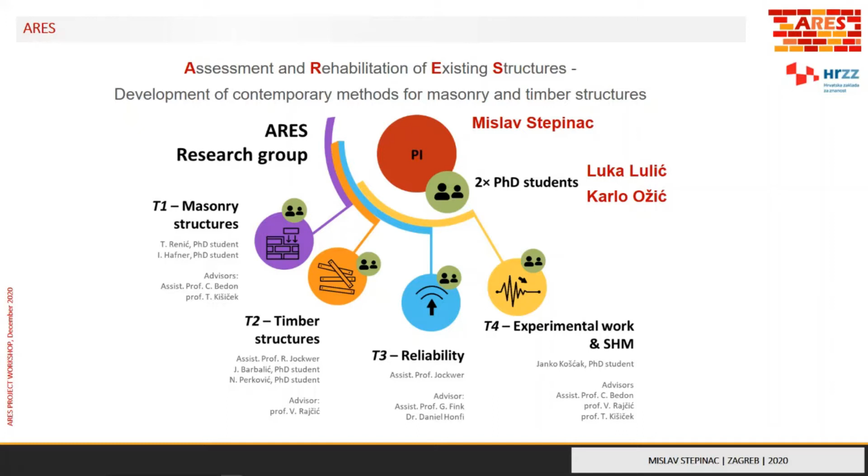Unfortunately, Daniel Honfi is not working anymore at ARES, so he will not be part of the working group because he has some other obligations now. For experimental work, we have all of the professors from University of Zagreb with Ivan Dubnjak, Domagoj Damjanović, Marko Bartolac from our lab, and of course Professor Kišiček, Rajčić, and Chiara from Trieste as advisors.

So I will not go into these objectives because I was talking about them yesterday. I'll try to shorten this presentation, but it will be online so everybody can see what we are basically doing and what we are dealing with in this project.

This is the timetable or timesheet of the project. We decided to have 20 different case studies, 10 for timber, 10 for masonry, and we will do proper assessment, on-site assessment, proper modeling in the office, and we will have several case studies also with proper structural health monitoring and continuous structural health monitoring.

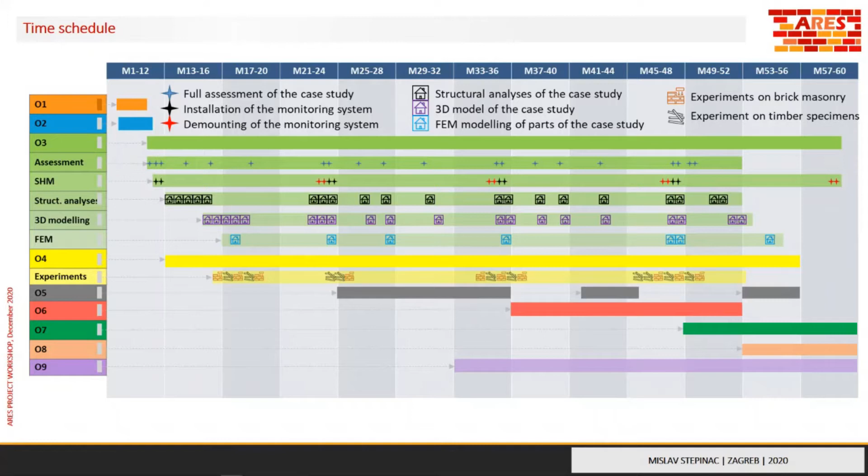In the end, we will do some reliability and proportionality analysis just to achieve material properties, loading history, and parameters that are influencing structural performance of buildings. In the end, we want to produce something to help engineers in their normal daily work.

So we have several project modules. The first one is development of a concise database of structures and assessment techniques, with compilation of an inventory of material properties and load types.

Then we have model development, analysis, and sensitivity studies in module 2. In module 3, we have model verification and optimization with some experimental work in the lab. And in the end, we have evaluation of proportionality and reliability, and design and development of design guidance.

So in the end, we want to produce something to help all of the engineers in the field to have easier and quicker assessment, and of course more correct assessment, of existing masonry or timber structures.

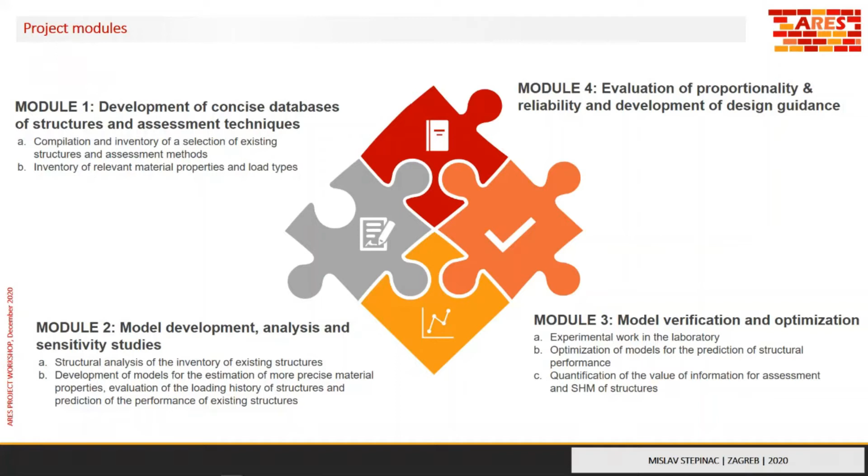As you probably know, Zagreb was struck by an earthquake on 22nd of March. This project started on 9th of January, before the earthquake, and we are dealing with masonry and timber. So for us, this is actually a great opportunity to have a lot of case studies, because we will have the opportunity to assess more buildings because of this earthquake.

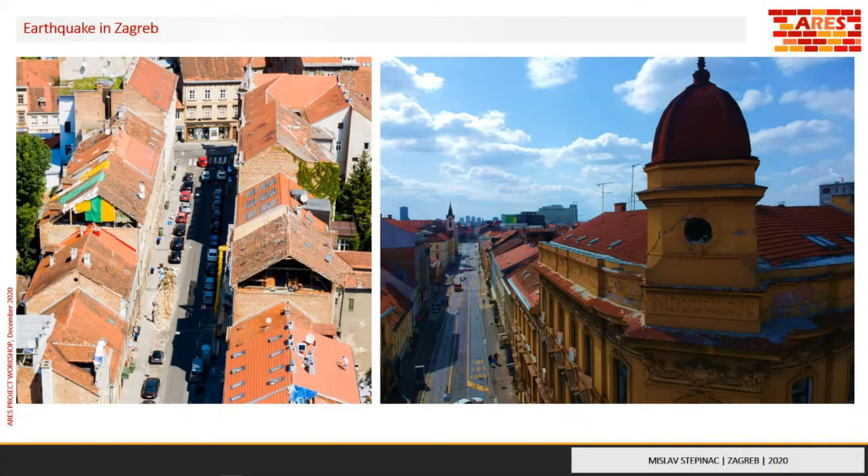You can see on the figure on the left how one normal street in the downtown of Zagreb looks like now, after the earthquake. The earthquake was moderate to severe, so we don't have a lot of collapsed buildings, but we have a lot of damaged buildings. So basically, for the next 5, probably 10 years, we will do the rehabilitation and renovation of this kind of buildings, which are of course masonry buildings with timber roofs and timber floors. On the right, you can also see some structural heritage objects which were heavily damaged.

So today we will have several presentations.

So it will be several of us from University of Zagreb. Then we have Robert from Chalmers University in Sweden, in Gothenburg. Yesterday there were some presentations from University of Minho. So if somebody is interested, they will be also put online on our webpage.

Chiara will have one presentation. Chiara is coming from University of Trieste. Then Igor and Iztok from InnoRenew and University of Primorska, from Koper in Slovenia. They will share their knowledge from the assessment of existing structures in Slovenia.

And I'm particularly happy because we have two designers who will share their knowledge: David Andić from Studio Arhing and Ivan Matorić from People's Associates Structural Engineers, who I'm really thankful to for sharing their time, because it's not very often that people want to produce, show and share their knowledge, since they are always too busy. Ivan and David are very interested in this work package. We are doing it with both masonry and timber, and we'll see what they are doing in their professional time.

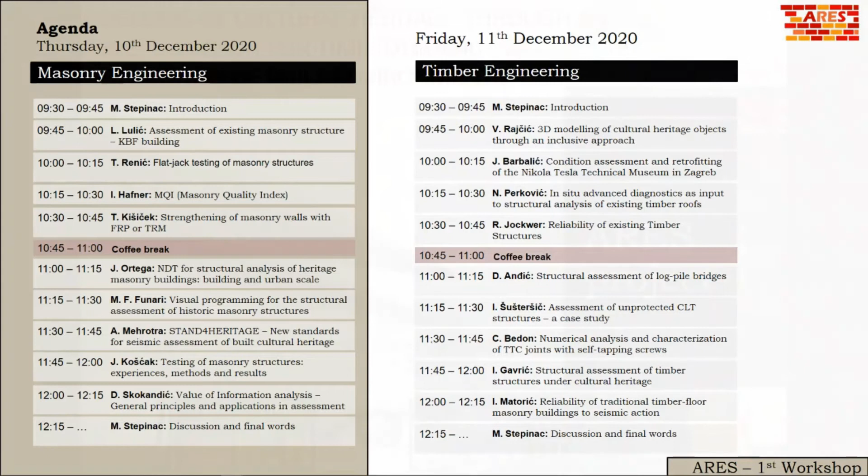And now I want to introduce Professor Vlatko Rajčić. Good morning, everybody. My presentation will be connected with the Horizon project Inception.

The work that we did is a very important task for cultural heritage: digitization and 3D modeling of cultural heritage. This will produce very large amounts of data after all this digitization is made in the world, so what to do with the data and how to manage it. Inception was a very complex project with lots of topics, and I will try to explain the main concept of the Inception project, the main goals, and some of the results we achieved.

You see it's inclusive and time-dynamic 3D reconstruction, that's its aim, for everybody from everywhere, inclusive for all types of professions, in a model that everybody can use. As you can see, it's from the program Horizon 2020 Reflective, a social program, and this concept tries to bring cultural heritage to everybody.

That can be used remotely to visit cultural heritage sites. It started in 2015 and ended at the end of 2019. You see the web page if somebody is interested, there is a lot of material there. I will bring just a very small amount of the information.

The consortium was made of 14 partners from 10 European countries: 5 universities, 2 research centers, 6 SMEs, and 1 industry partner, which was very important because they produce laser scanners. In this project, they developed software as well as hardware dedicated to laser scanning of cultural heritage objects. This is our team.

From UNIZAG, it was mainly the chair for timber structures. Mislav was there in that period with Jelena Bleiziffer, who is not from the timber structure field but helped us with the BIM.

These were some of the aims, and we will now go to what was done at the University of Zagreb. You can see one of the case studies. We had 2 case studies. This one is the Technical Museum Nikola Tesla in Zagreb.

For the capturing of 3D data, we used photogrammetry as well as unmanned aerial vehicle drones. This is the model that we obtained by drones. This is our equipment.

As you can see, it's the Cadmic Goliath 8 Max system, consisting of a drone with payload up to 5 kilos with 8 propellers. This is some technical data, and it could be navigated via GPS or manually navigated. Importantly, it has displays on the land, on the tripod, so you can see everything going on with the drone on the monitor.

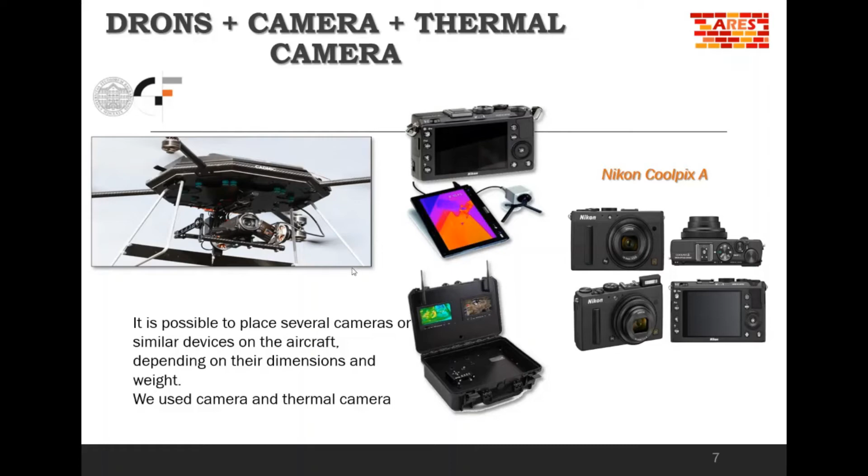You can see it's possible to put several devices on the gimbal of this drone. We usually combine a camera and a thermal camera to see what's in the roof and all around the structure.

Further on, with the help of the University of Ferrara, we did laser scanning of the Technical Museum, obtaining a point cloud of very high accuracy. So now the museum has every point documented in a very accurate manner through this laser scanning.

Having these 3 data sources and lots of data from the previous period when we did reconstruction works, assessment, NDT testing, and all kinds of visual inspection measurements—which will be presented by Jure after me—we were ready to put this case study on the Inception platform.

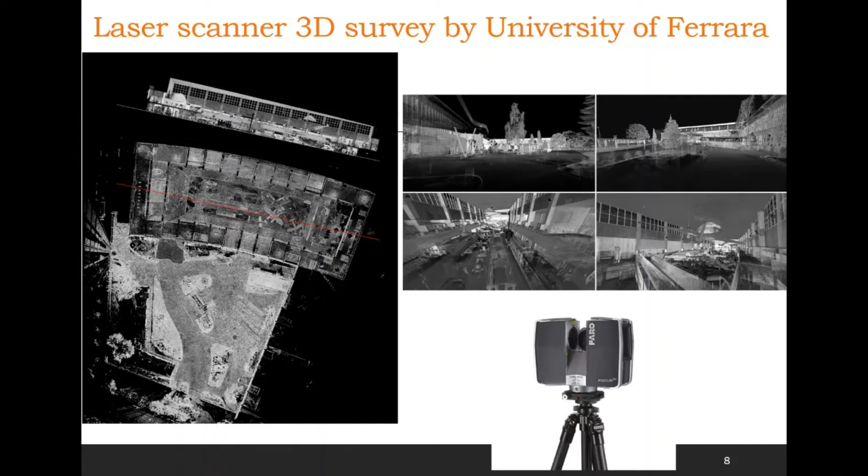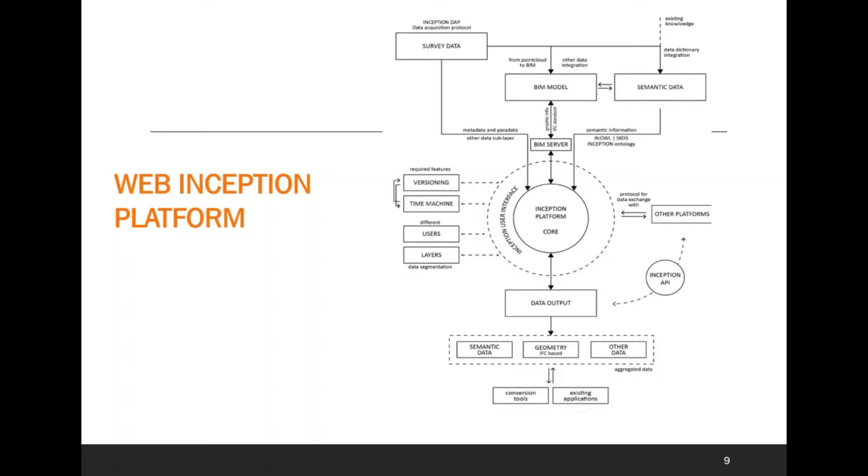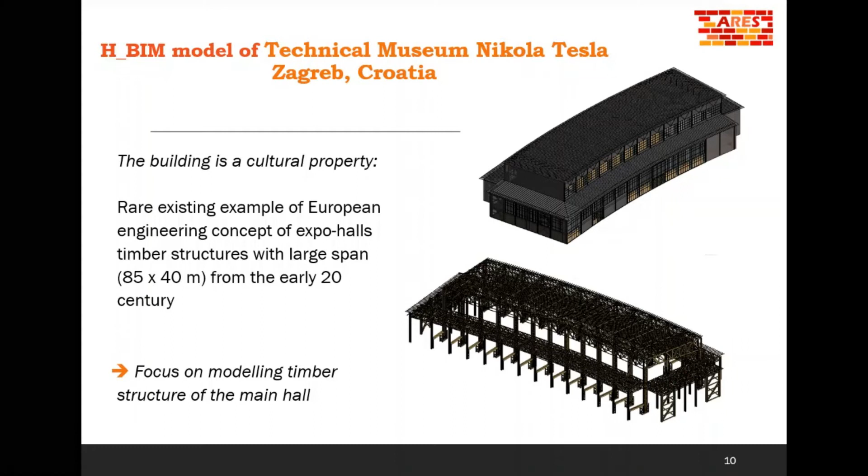Our focus was on modeling the timber structure of the main hall, hall A. You can see the structure covering the whole object. The BIM model was modeled in Revit software and reconstructed from available documents and on-site measurements that we did before.

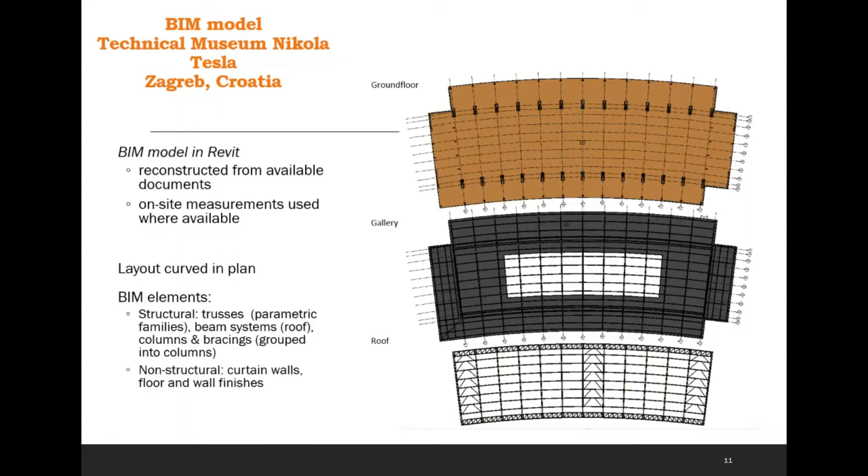The layout, as you could see, is a curved plan, a cutoff of a curved plan, and the BIM elements are structural and non-structural. Regarding the structure, we have trusses—primary and secondary trusses.

In the longitudinal direction are the secondary trusses, which you can see above. All the trusses and elements were modeled as parametric families.

So if you change one thing, you don't have to change all the elements—everything changes according to just one parameter. We had a lot of beam systems, for instance on this gallery and also on the roof.

There was a very large variety in forming the columns, which are multi-part columns with diagonals. These are space diagonals forming very high bearing capacity columns, with bracing systems also present in the structure.

Non-structural elements, which we can see here, were curtain walls, floors, and wall finishes.

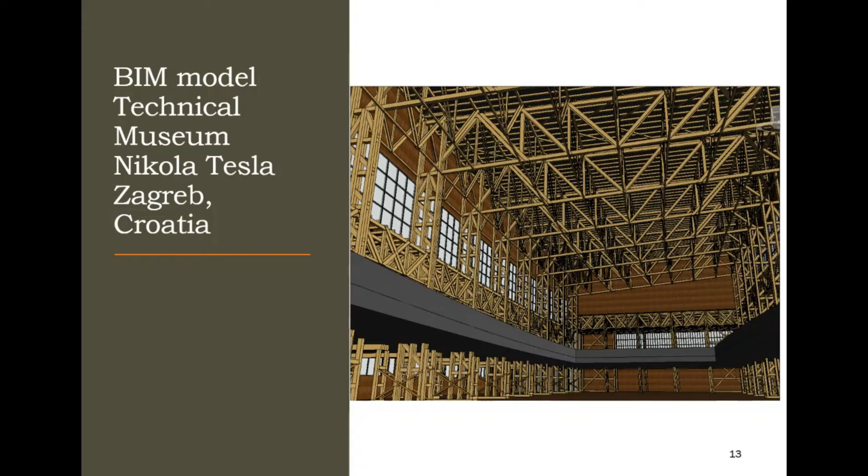So we now see impressive structure, which could not be seen when you enter the museum because it's all covered with a lining. We will see the picture. So we try to emphasize that it is a very valuable structure underneath this layup of the technical museum.

As it is a very complex structure with also, as mentioned, curved alignment in plan, there was a large number of elements. There were very large files, heavy files, which had to be uploaded into the BIM server.

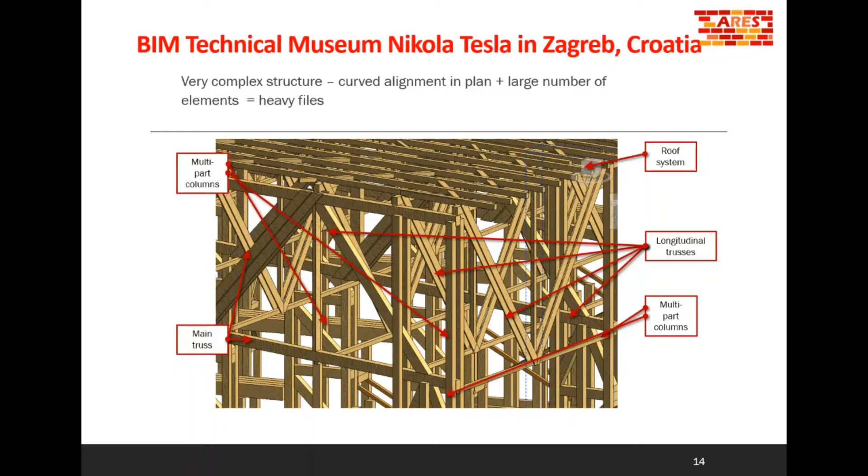So this is the scheme, just the upper part, because we are coming from three parts as input: survey data, then the BIM model, and on the right side semantic, which is very important - I will explain later. So this Inception platform on the left, survey data, we also put metadata or paradata or any other layers into the BIM server.

This central part is a BIM server. That means that the BIM model from IFC standard, whatever software you are using, you get IFC standard format. And here you can also put additional graphic info as an input to the BIM server.

Usually, for the additional graphic info, we use some graphic files, and especially for another object it was a texture of stone. But for this, we didn't put so much trouble into the texture of certain layups.

This is the BIM server. So the data are coming to this BIM server, and it is the interface where we prepare the model to the conversion. So in this part, you can also add some properties.

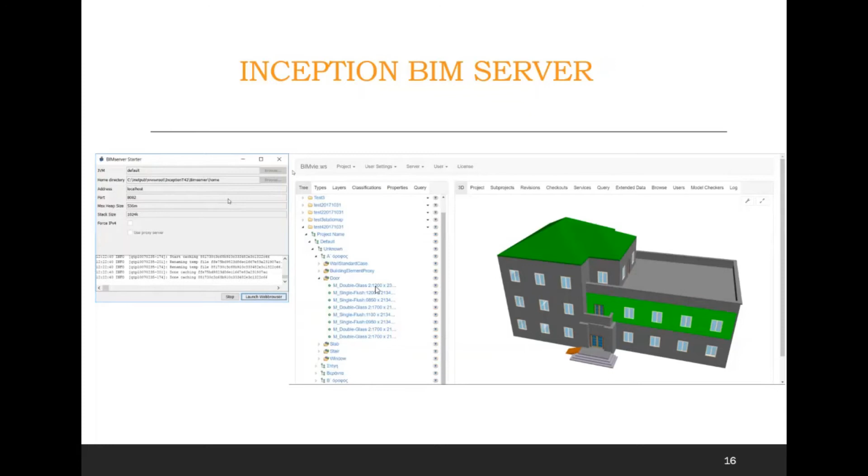Further on, there is a possible path on the right side for input semantic enrichment. For the Inception platform, semantic data store is chosen, not object-oriented programming, but the semantic.

And for that, a powerful SPARQL 1.1 support engine was used. And the same engine performed powerful queries inside specific 3D IFC models also. Different options can be used as well, as it is one unique solution.

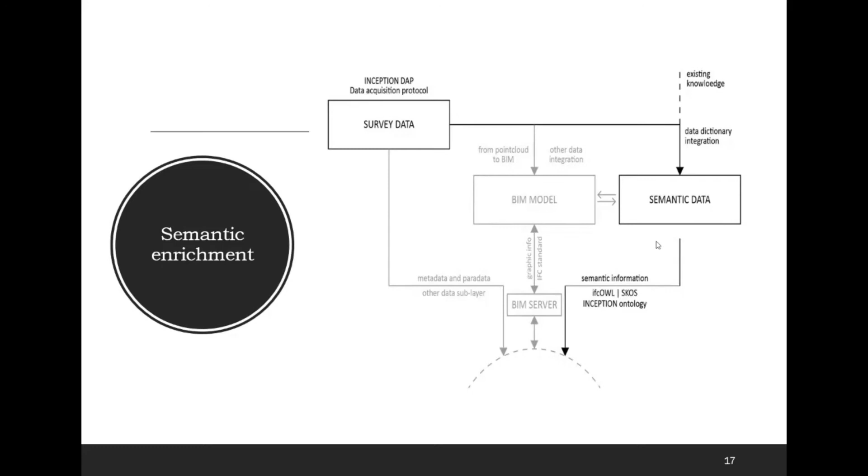And also with this semantic data, we can visualize the SPARQL query results. We will see it later directly in the web-based 3D viewer.

So we are actually going from the BIM to this another type of format, so from IFC to RDF format. IFC is well studied - it's this BIM format. Also, it's freezing and documenting the design status of the model.

And this is for this platform. It is very good that you can model in all kinds of software, so it can process the data irrelevantly of which authoring platform of IFC you used.

So IFC, this BIM model, is now transferred into the so-called Resource Description Framework. It's a family of World Wide Web Consortium specifications. The format was originally designed as a metadata model, and now it is established as a general model for conceptual description of information that is implemented in web resources. It is also adopted by the World Wide Web Consortium, and it was recommended already in 1999.

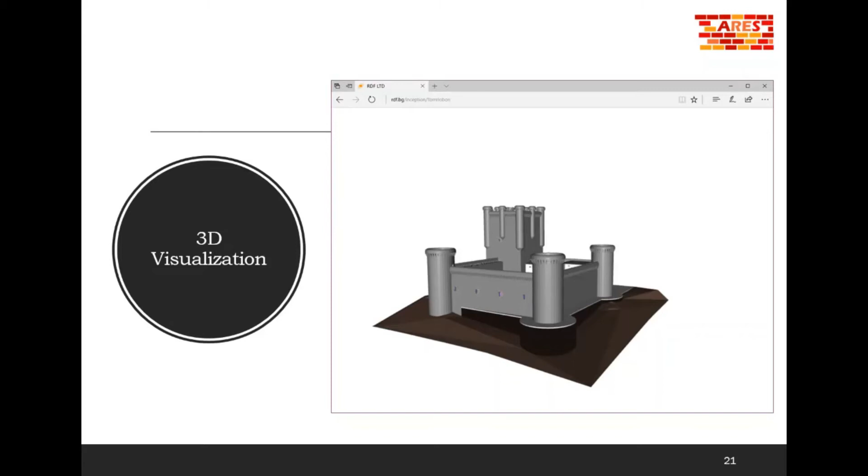So after that, we are now in RDF format, and in that format we can also do the visualizing of everything that we need. This is one case study from Spain, a very old fortress.

Also, elements of the model on the web platform can be selected by the semantic. So indeed, in this RDF format, everything is done and chosen through the semantic characterization. On the right, you have all the data of the selected elements in the form of semantic data. So if you choose, for instance, you can select by the thickness, by the material, by the age of some elements, and so on.

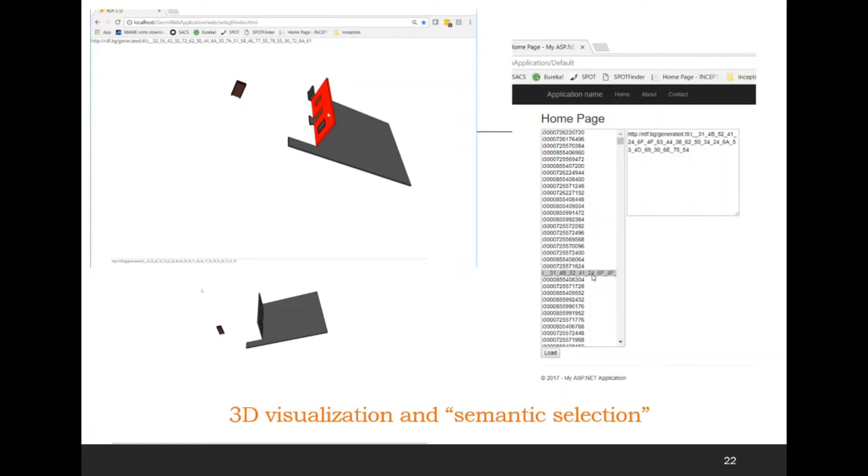Also, the whole files can be treated as semantic documents. Coordinates or GPS system already brings you one semantic level, since the position where your object is located matters.

After that we have the use of the Inception platform, and one option is the time machine, which this project is famous for. So you can also put the time dimension into your modeling.

For instance, we did it with our case study inside the Technical Museum, which is not so new, it's from 1948. But another case study was a very old church in Dalmatian Zagora. We built this model as a history model through 4 phases, from 1688 until 1911, 4 phases that we could find in the archive, mainly always additions to the existing structure.

So on the Inception platform, we can see this available time, the so-called time machine, time dimension. You look at some object and you can see it through time.

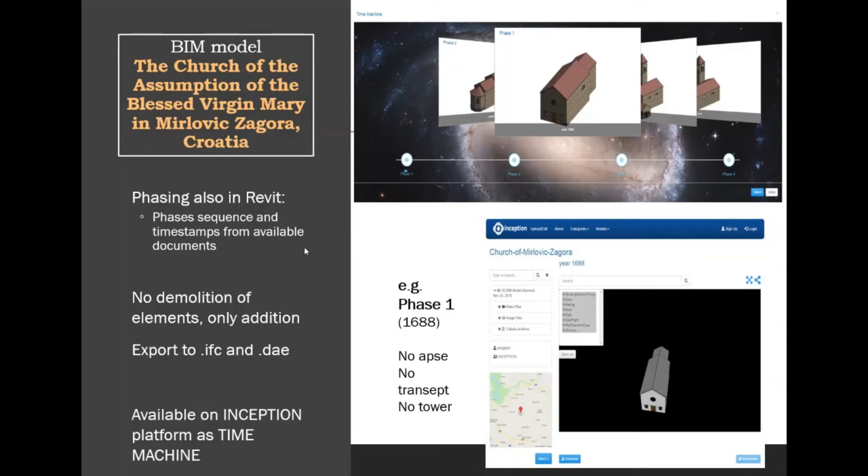Another possibility of use through the Inception platform is versioning, so we can use this data for all kinds of purposes. For instance, in the Technical Museum, we did this application for the artifacts, in the Tesla cabinet for instance, we did it for all the artifacts.

It's based on, you can see this with the automobile. On the shape, you just put your application tool and find the shape, and when it fits the shape, you get all the information from all kinds of data retrieved before about the artifacts, so you can see what you put - all the photographs and technical information and so on, whatever you want to show to the visitors.

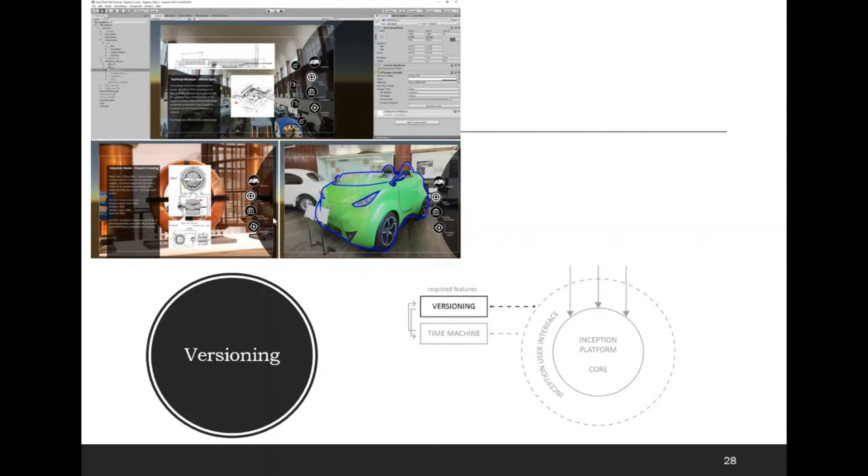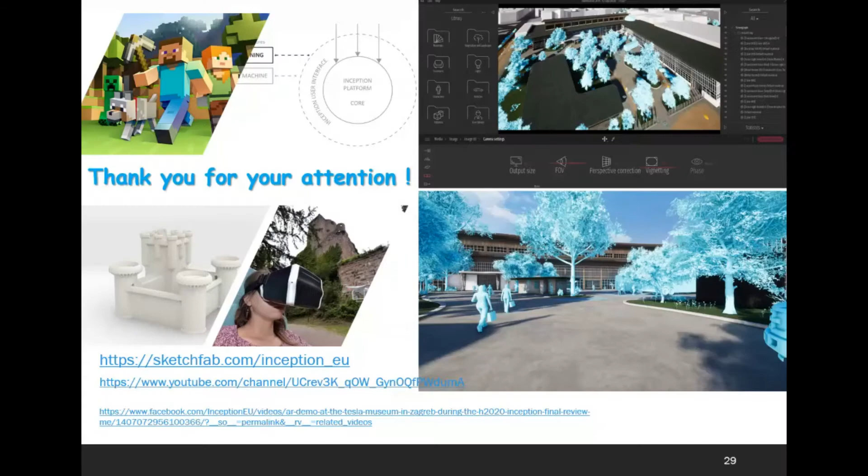Also, we can make all kinds of virtual tools. We can make films, we can build augmented reality applications, all kinds of virtual tools. We can go through the object through virtual reality, all kinds of applications.

There is one additional thing I was planning to show you. It is connected to the application. On the Inception website, you can see a lot of applications also for the Technical Museum, where you can put the application and see beneath these linings, you can see the structure.

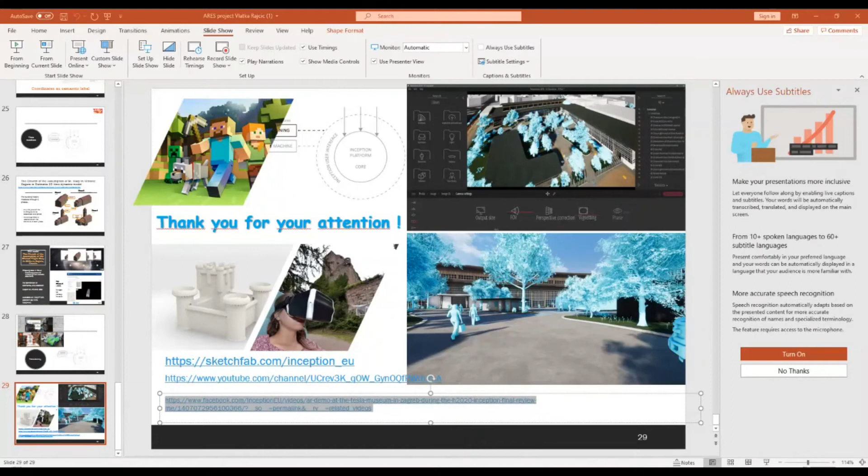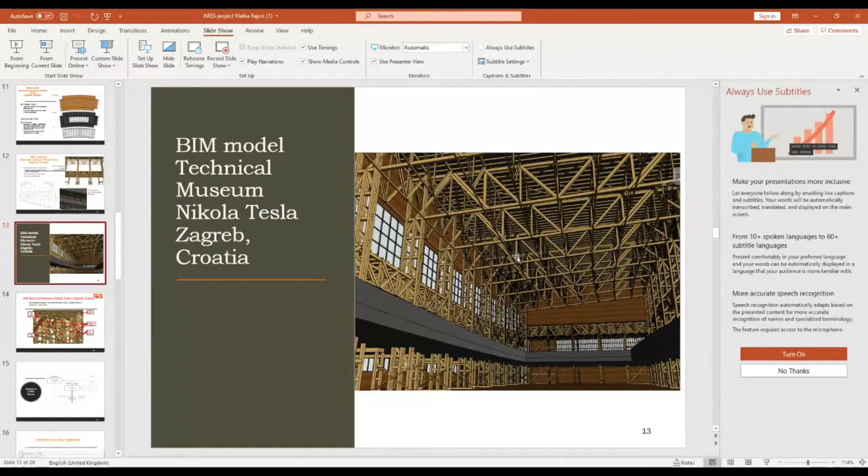For the visitors, they can see beneath the real museum, they can see the whole structure. So if you are interested, you can go to the Inception website, which was presented here, and you have YouTube videos also for 3D and time machine.

One case study that was especially well established and refined is the Innocenti Center in Florence, which goes through the times - they have lots of phases in which they developed their model. So that's all, thank you very much for your attention.

And if there are some questions, I don't know if they will ask now or later on.

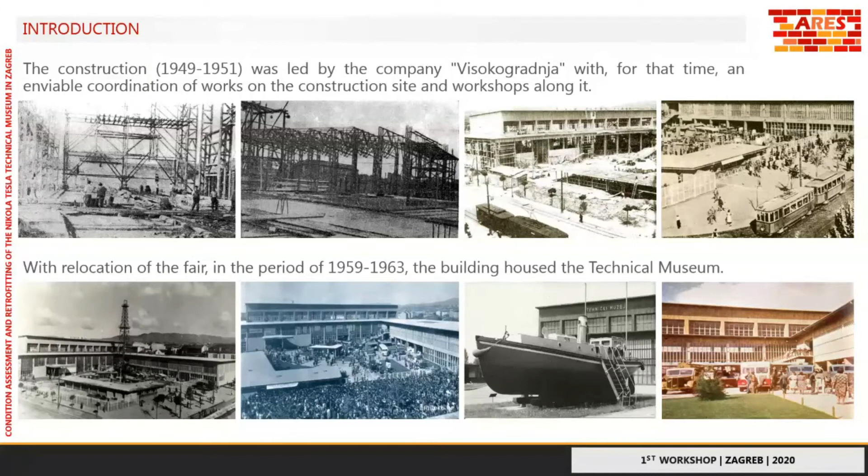It should be noted that all construction was done with hand tools and cranes, without the use of now modern machines. With the relocation of the fair in the period of 59 to 63, the building finally housed the technical museum.

In 2009, for the first time, condition assessment and serious retrofitting work on now protected cultural heritage buildings were started. We can say that the whole complex can be divided into four buildings: the main museum building, Hall A, which is the timber construction; Hall B with offices, workshops, and storages, that part partially concrete, partially masonry; and smaller auxiliary buildings, Hall C and Hall D, in the yard.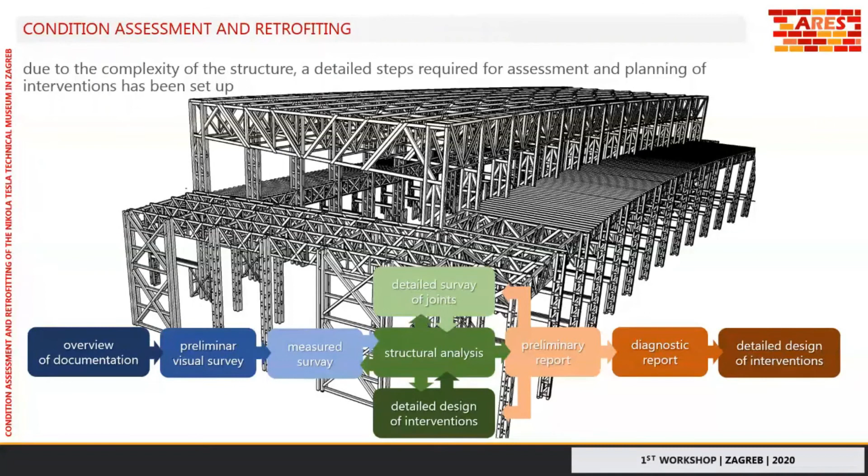On this chart, we can mark the central part as the most important, due to the fact that the works were carried out in parallel with the work of the museum, so there was a need for good coordination. We started with the overview of documentation and visual survey.

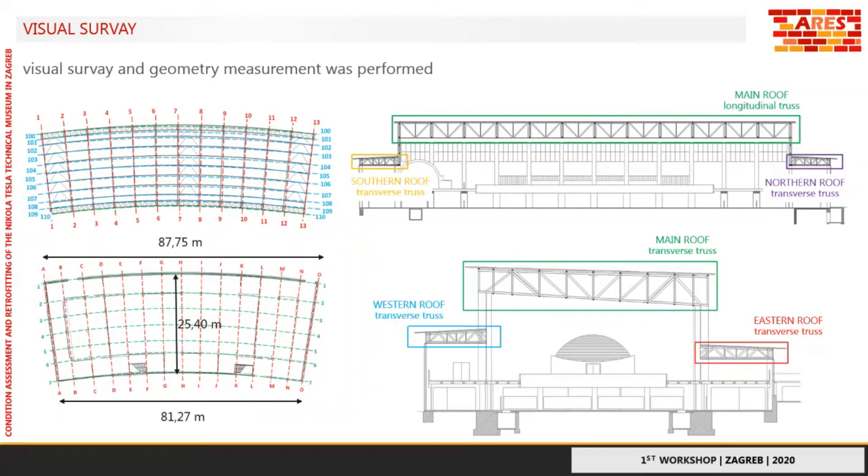The main reason was the point cracked or damaged roof insulation, but problems also occurred due to the drainage, which helped water retention mostly on the east courtyard side. It resulted in the complete rot of the bases of the columns, which was the biggest problem in this retrofitting job.

We also made some ultrasonic determination of the modulus of elasticity, with some resistograph inspection on some cracked or damaged elements.

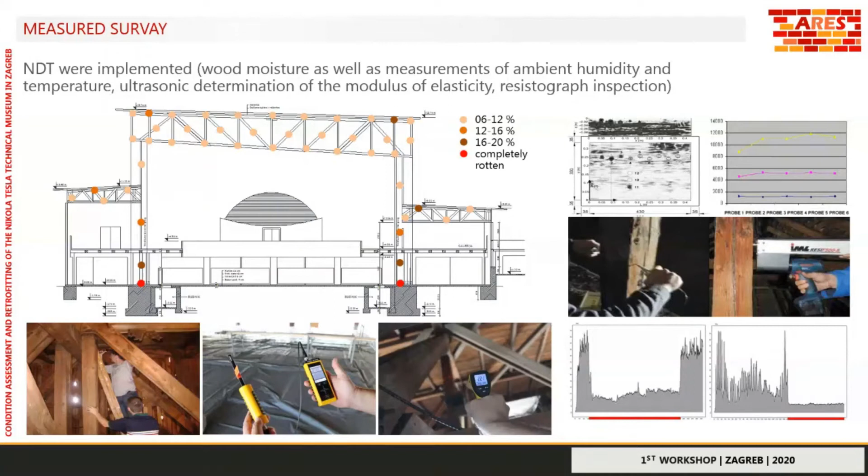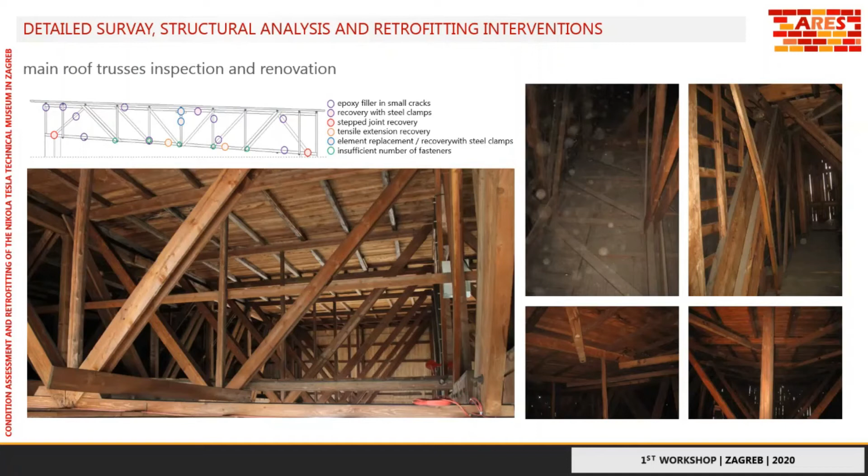During this inspection, we most often found the problem of cracked elements, which we solved by filling with epoxy glue if the cracks were small, or using steel clamps if the cracks were bigger.

We also found some problems on the tensile extension joints, as well as on the step joints. Again, we used additional steel elements and epoxy glue as the solution.

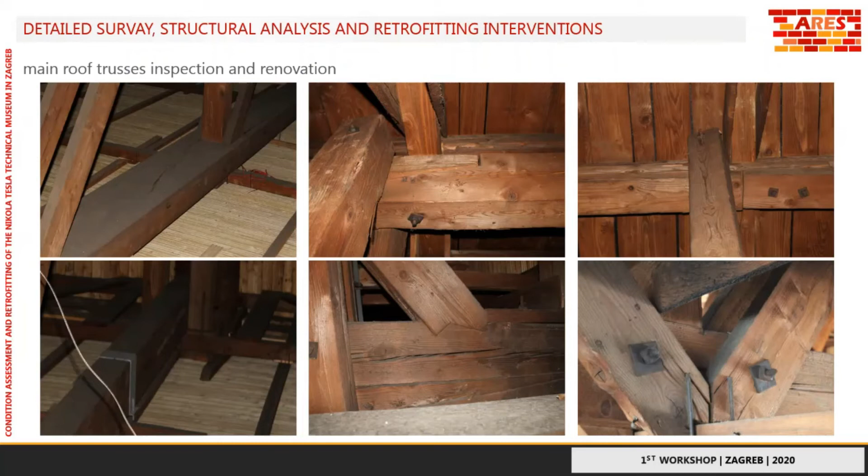But the bigger problem was the insufficient number of fasteners in the joints, as well as torsional damages of some elements. On the side roof trusses, we can see how we solved that problem: we used additional new elements put up against the old ones, with a sufficient number of fasteners, to better solve the joints.

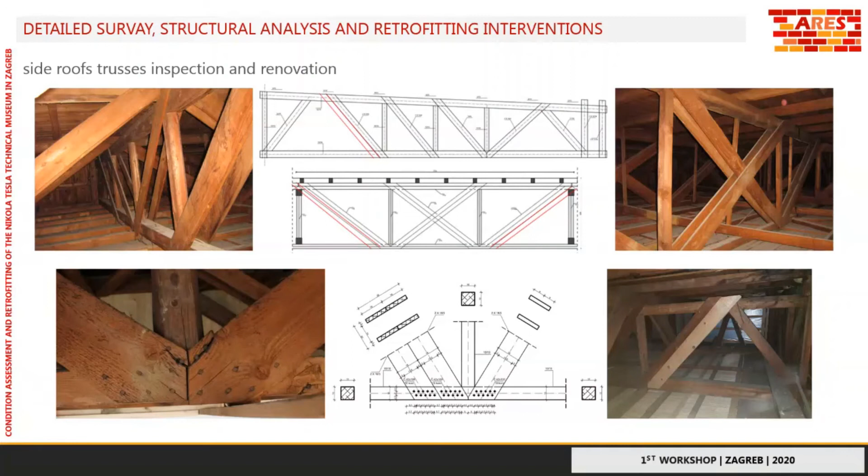After we examined the roof trusses, the next problem was the gallery floor beams, which were seriously torsionally damaged. On the next picture, you can see how twisted they are on their ends.

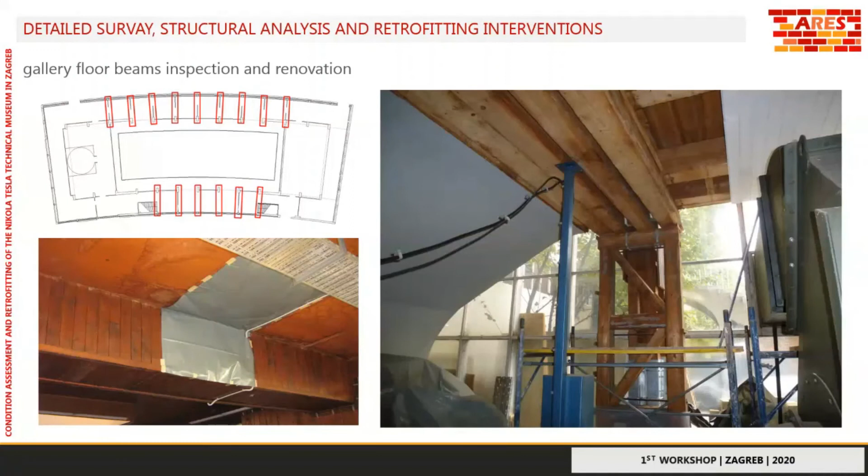We just put some steel brackets on the beam ends to prevent torsional effects. Also, we found some cracks which we filled with epoxy glue.

The next thing, which was our biggest confrontation, was the rot of the columns. We found the biggest percentage of rot in the eastern and western facade columns, so the solution was to hold the whole structure above the columns.

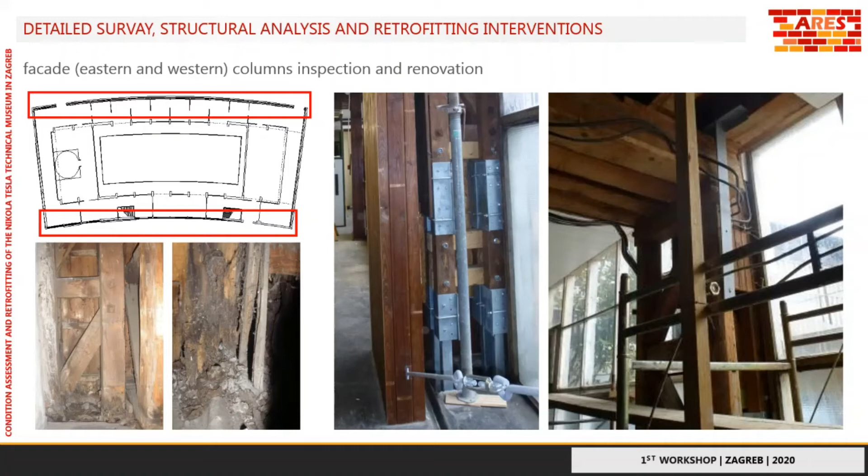We cut the bottom and put in some new steel elements to solve this problem. We also put additional steel brackets on the top of the columns to connect the columns with the horizontal beams and trusses.

When we examined the northern and southern facade columns, there wasn't such a big problem, because we found just smaller cracks and a partial problem with the joints at the bottom of the column, but it was easily solved.

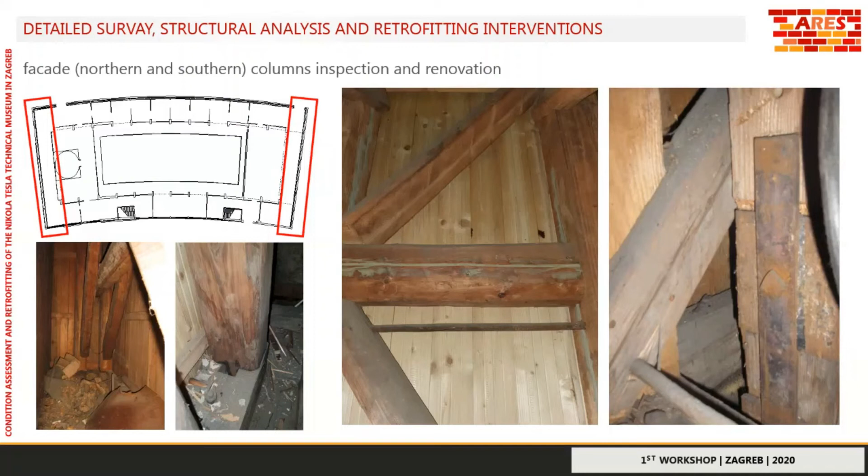The bigger problem was the inside columns, because there was again a high percentage of rot. So we put an additional base made of concrete. Again, we hold down the structure above the column, cut the bottom, and put this concrete base with additional steel elements.

And again, the standard solution for the cracks was the epoxy filler. So after we solved the problems with the whole construction elements in the roof and in the columns, we started to examine the stability of the whole construction.

In the original design, only bracing on the gable sides was done, of course, in the course of the timber elements. But then we decided to put an additional transverse bracing system - the green and the yellow represent the new one.

So we put the steel braces in the facade part in the middle, and also put bracing between the bigger columns at the end and the middle field inside the building. So this solution was very good and easy to control during the time.

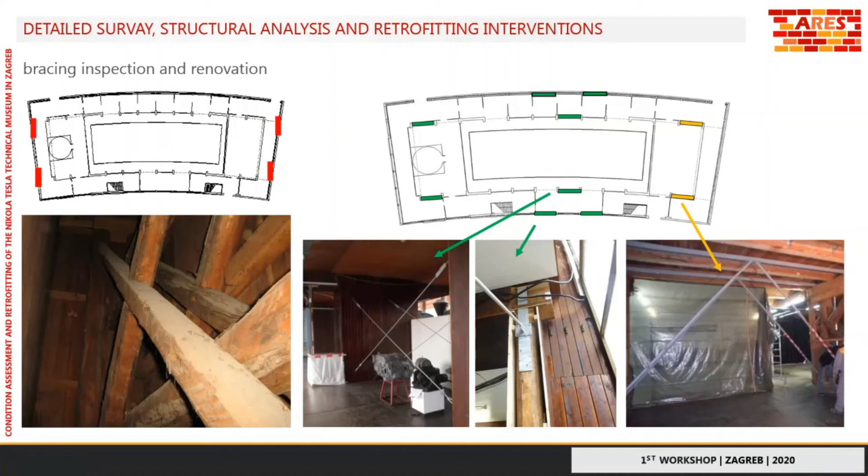So our final job was facade inspection and renovation. Although mostly architects designed this facade, we also did some work designing the connectors of the new facade, as well as the inspection of the facade construction.

So the interesting thing during the inspection with the thermography camera was that you can see through the wood paneling the main construction or timber trusses inside of the building. So it was very interesting to present this type of inspection.

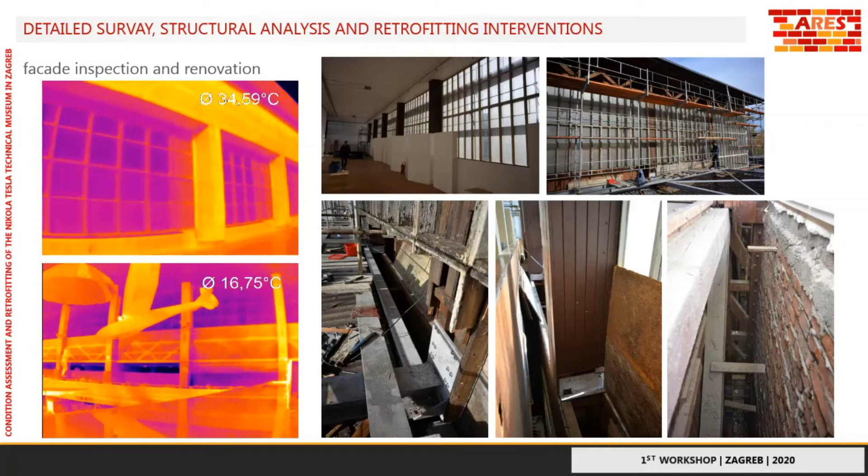So the assessment work is a permanent job. We were able to confirm this during the earthquake in March this year. So our main target during the inspection was the condition of the bracing system, as well as the condition of the joints in the column bases, and of course, the roof trusses.

We found that most of the joints in the column bases and the bracing diagonals are in good condition without any damages. In the roof trusses, we found just a few damages regarding the appropriate type of fastener, as you can see in the picture, but there weren't any serious damages in the whole construction.

After that, we made some preliminary numerical modeling of the construction, and we applied the highest ground acceleration for this type of state, and found that the construction is okay, but the displacement at the rooftop was somewhat bigger than the limit. So we concluded that this new steel bracing system should be extended up to the roof truss.

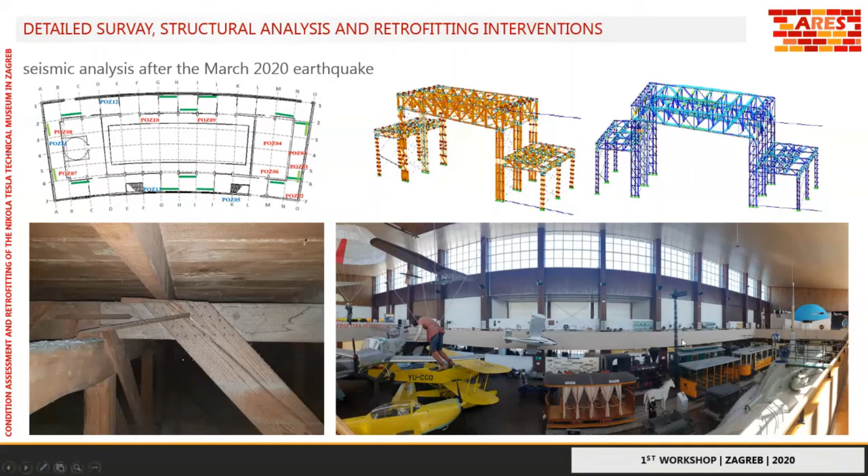What I can say is that this was a logical solution. After we put this bracing system in the model, the displacement at the top was within the limit.

So in the end, we hope that this 70-year-old temporary building will experience at least its 100th birthday, and that we will in the future have more opportunities to explore its maybe a little bit dark but interesting construction. So that's everything from me.

Do you hear me yet? Yes, okay, great, so I'm ready. Let me just share my screen please. Are you able to see it? Yeah. Do you see my screen? Yeah. Yes, we see it, we see. Okay, thank you very much.

So, hello everyone. First of all, I hope you are all very well in these chaotic times. I'm very sorry that we cannot see each other and socialize normally, but it is how it is - we'll all have to be a little more patient. I believe each of us can't wait for all of this to end. Of course, I don't mean this workshop, but the epidemic situation. I have to joke a bit. I hope Mislav doesn't mind, considering how strict and serious he is.

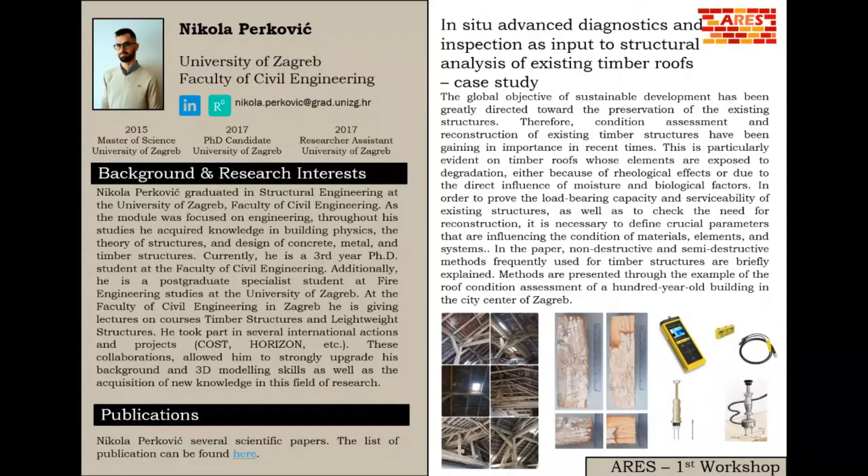Let me say a few words about timber and wood. For centuries, wood has been used as a structural material. However, timber structures can experience significant deterioration and damage, limitation of use, and often require replacement or retrofitting. It is therefore fundamental to define methodologies to assess safety and to predict how safety will evolve over time.

In the case of typical roof systems, stresses and deformation can be calculated considering linear elastic analysis based on finite element analysis or the displacement method, due to the simple nature of most timber structures.

Complexity, on the other side, is increased by the influence of load duration and moisture content. Also, the geometry of the cross sections is an important parameter, since members with irregular cross sections and large variability along their length may be found, especially for older structures, requiring time-consuming in situ measurements.

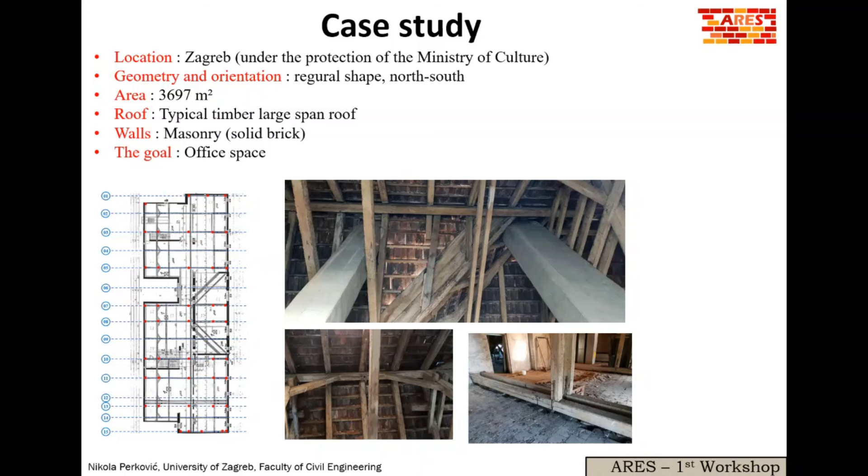What was actually the final goal, the final objective? The objective was to make a complete assessment of timber roof structures, as well as to give data for design, repair, and strengthening the structure. The final goal was to repurpose the space and make it office space.

Now we come to the assessment methods. I want to connect this with the earthquake that struck the city of Zagreb. It is very important to have concise and comprehensive methods for a condition assessment of all building materials. We heard yesterday about masonry, and today we talk about timber structures.

A wide range of assessment methods for assessing the overall condition of existing structures is currently available. These include acoustic, electromagnetic, thermal, and optical methods, as well as mechanical techniques. The most common methods are visual, hands-on inspections, tapping, mapping of cracks, and so on. I'll talk about that a little bit later.

The first step in the assessment is to determine appropriate methods, taking into account factors of cost-benefit analysis. The last step is to incorporate the assessed data into a model that will be used to calculate the remaining capacity or even reliability of such structures.

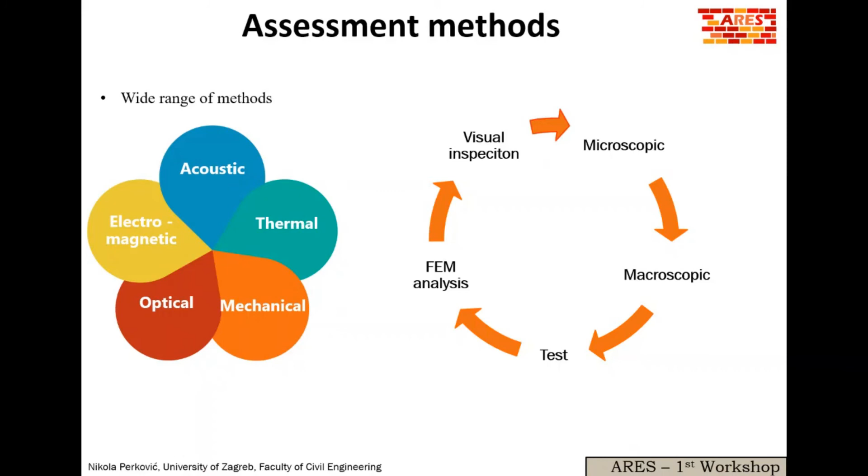You can see some of the methods on the slide, but for some of them, I'll spend the next few minutes explaining them in more detail, as you'll see in the next few slides.

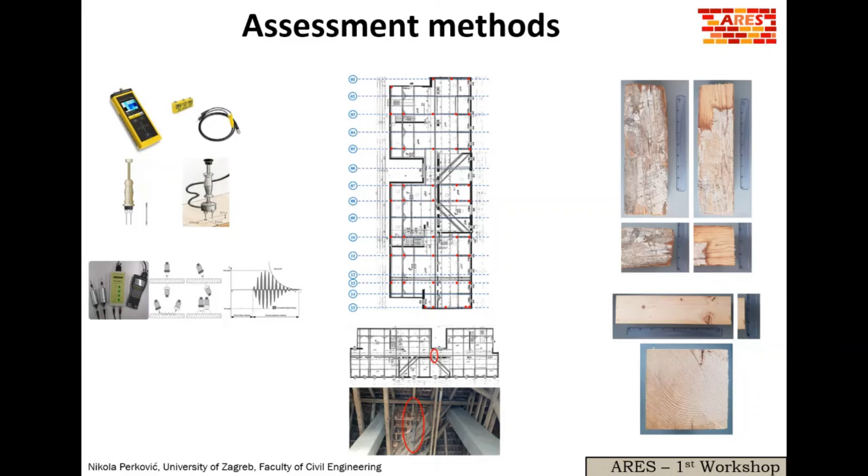First, I want to talk about determination of duration, load duration class and moisture. Determination of load duration class and use class according to the given norms is based on visual inspection of the roof and measurement of the amount of moisture in the material by indirect method using a hygrometer. The electrodes are connected over the piston to the measuring device with a cable, required for electrical signal transmission.

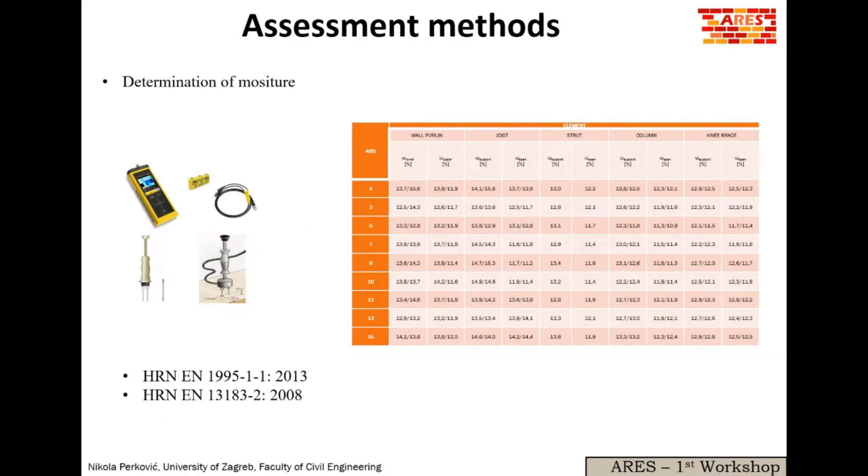The measurement results for individual elements are given in the table, where the equilibrium humidity in the wood is defined in mass percentages, given as the ratio of the difference between the mass of wet and dry wood and the mass of dry wood. Here in the table you can see the results.

The next topic is determination of wood class according to the norms given in this slide, also based on visual inspection of the subject roof structure and measurement of density and modulus of elasticity.

In the measurement settings, the device was set to measure the speed of the signal, transmitted as a low frequency wave of 22 kilohertz, but also to measure the maximum value of the energy of these waves. In this way, the speed of signal propagation is related to the modulus of elasticity.

The attenuation of signal energy is related to the characteristic of the material. The measurement results for individual elements are given in the table, where the dynamic modulus of elasticity of wood is defined in gigapascals, given as the sum of the function represented by the ratio of the square of the transmitted wavelengths in the longitudinal direction and the detected wood density, and the function represented by the maximum value that has been transmitted like a wave attenuation. In this way, when determining the modulus of elasticity, the direction of the fibers and non-linearity in the materials were also taken into account.

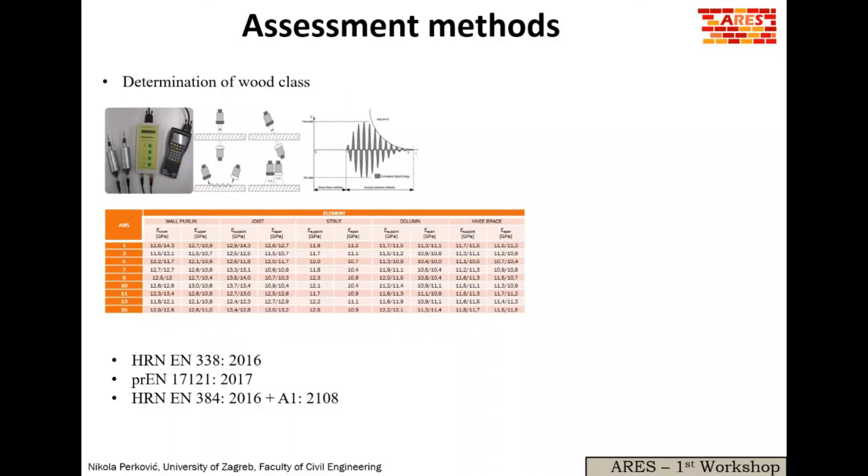Finally, the material density test was performed on samples of the timber taken from the load-bearing elements of the roof structures, and the investigation established a lower density of wood than is usual for the higher classes, caused by a loss of density with aging—that is, the hollowing of the material over time.

Also, the expected degradation of the modulus of elasticity over time has been established, and it can be assumed that the strength has changed only negligibly, which can be proven based on additional tests.

On most of the roof elements, there are visible cracks appeared as a result of moisture change and reduction process in the wood due to drying.

A significant degradation, caused by water leakage from the roof and by the appearance of decay, is also visible in some elements. Also, some elements have been strengthened or replaced during emergency restoration, but they are still considered degraded.

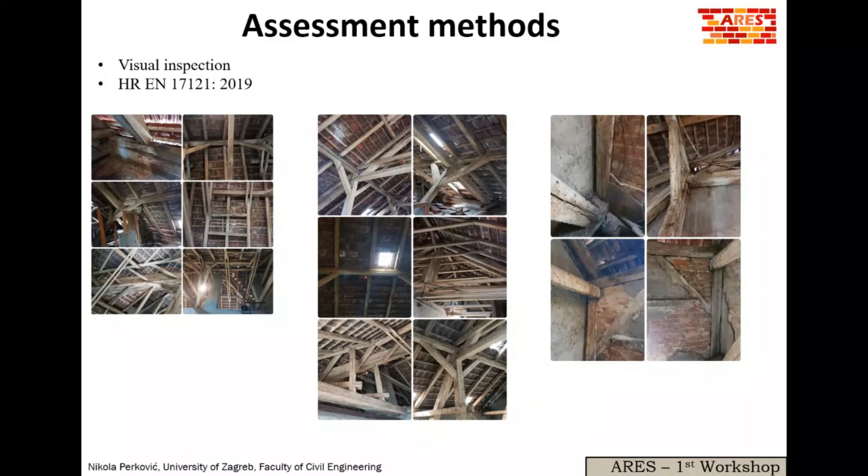General structure condition and renovation suggestions: investigative tests of the roof structures have shown that the structure is in relatively good condition, but that the replacement of degraded elements and the repair of cracks is of great importance.

Elements where degradation appeared due to water leakage and decay should be entirely replaced with new ones, at least C24 graded timber, dried to a moisture content of 15%.

Elements where degradation appeared because of wood drying and reduction, after the appearance of cracks, may be repaired by using low pressure injections of epoxy or polyurethane material.

The next thing is reinforcement, and all of the reinforcement details between elements might be made using steel clamps and self-drilling screws.

It is recommended to do the expansions in such a way that a layer of 50 millimeters of EPS is installed below and above the tie beam, and a layer of 25 millimeters on the side, so that all loads on the floor structures are not transferred directly or indirectly through the tie beam.

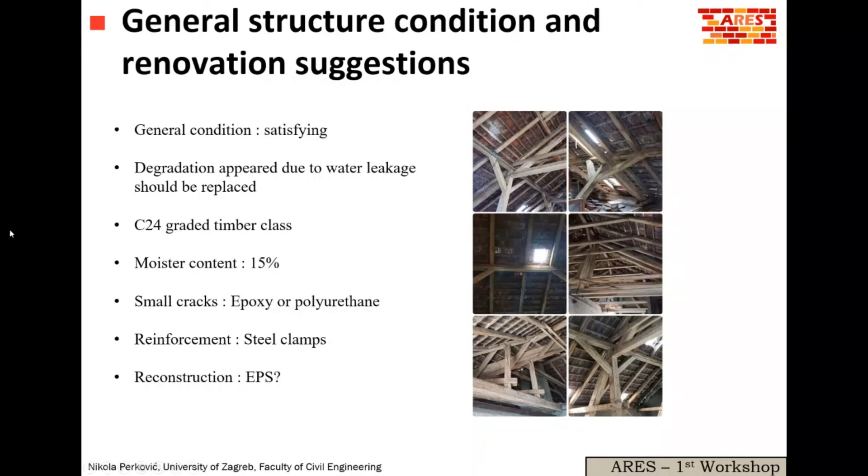To conclude, I would like to say that many assessment techniques are promising methods for a quantitative description. However, there is currently a lack of harmonized European standards in this field. With the last two points, I would like to express my regret, as well as my desire to raise awareness about building with wood.

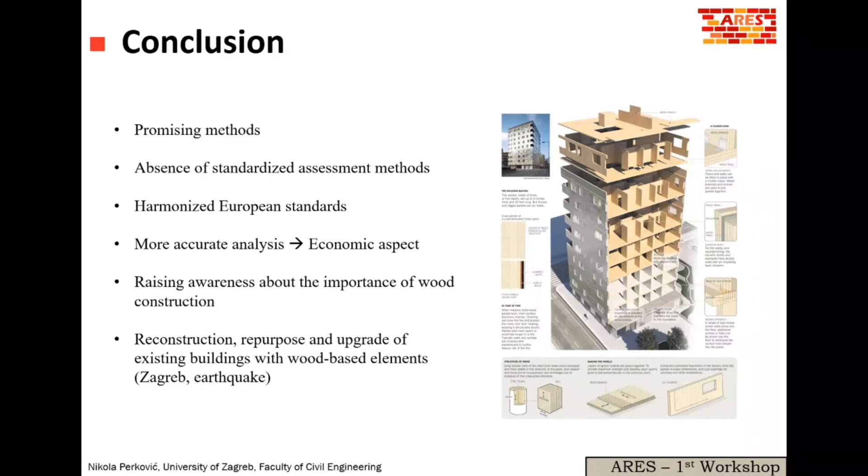This especially applies to the current situation in Zagreb, because Zagreb is affected by the earthquake, where the full potential of wood as a material can be exploited in the existing buildings.

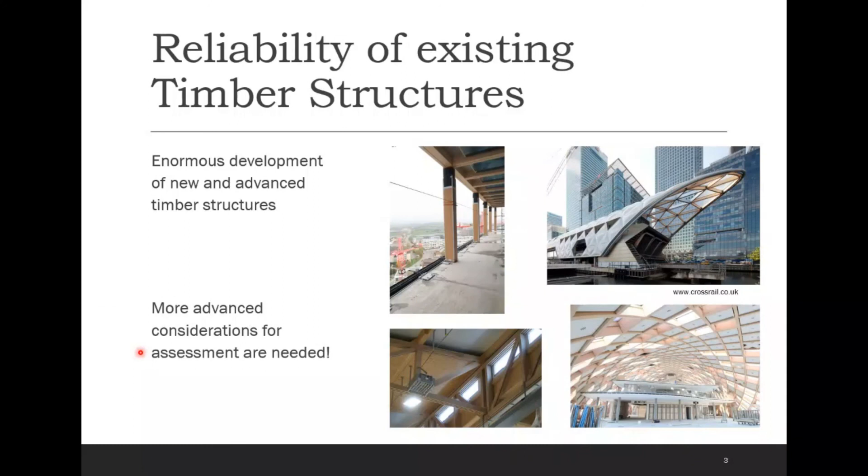So that it's quite challenging to design them, and it's a question of how we can take our existing knowledge to these new structures and assess the reliability of these very advanced structures. In the future it will be a huge challenge to assess these structures, because the use of these structures could change, where maybe higher loads will be applied, or other boundary conditions change, so that we want to extend the service life of these structures or reassess them. The challenge is how to do it in a good way, taking full advantage of the material properties of the structures.

Some thoughts on these new and existing timber structures. If we build a new timber structure, we have to design it, make a prediction for the future of how the structure will behave, predict or assume some loads. So it's based on a lot of assumptions and predictions, but we can then adjust or design the structure in a way that it fulfills the requirements in the most adequate way.

If we have an existing structure, we do the assessment, and we can benefit from the knowledge we have, as you all know, and update the properties or assumptions and boundary conditions in our structure, then do the verification, comparing what we know of the structure with what we expect from it, how it should behave.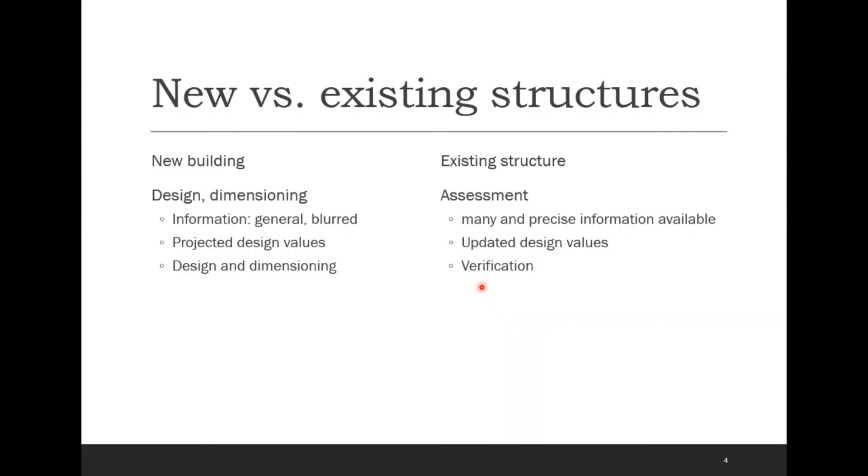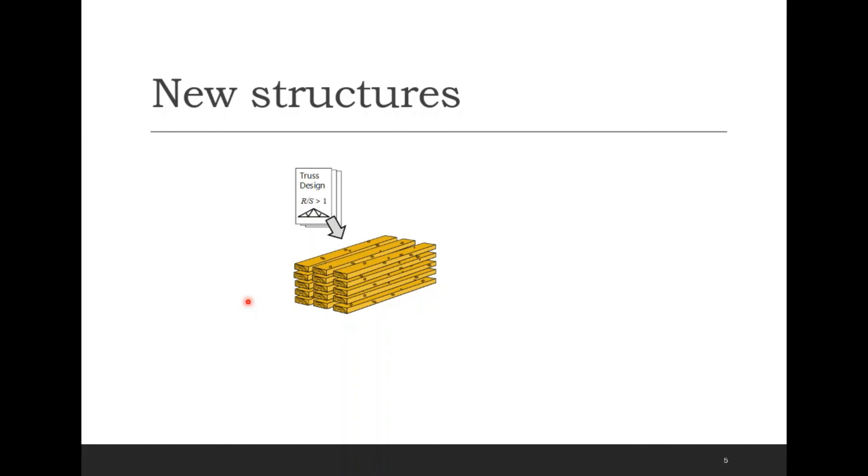I also put this in a graphical sense here. If we do the design of a truss, for example, we do the calculations on paper or in our files. We have to choose a material, and we have all these strength classes, C24 for example for timber, where it's quite an abstract number in a way, a certain characteristic property of a bunch of material that has these characteristic properties, and based on this assumption we then can tell the carpenter to assemble this structure together.

Since we don't know exactly which board is used from this bulk, we have to make some guesses, assumptions and safe estimates. The safety format comes into play, where we have the loads on one side, making an estimation of the loads acting on the structures, but also on the resistance side of the structure.

And we have to apply these partial safety factors to keep the distance between the load and the resistance, so to assure that the resistance is sufficiently larger compared to the load. Depending on the shape and properties of our material and resistance, we have to push both of these loads and resistance far away from each other.

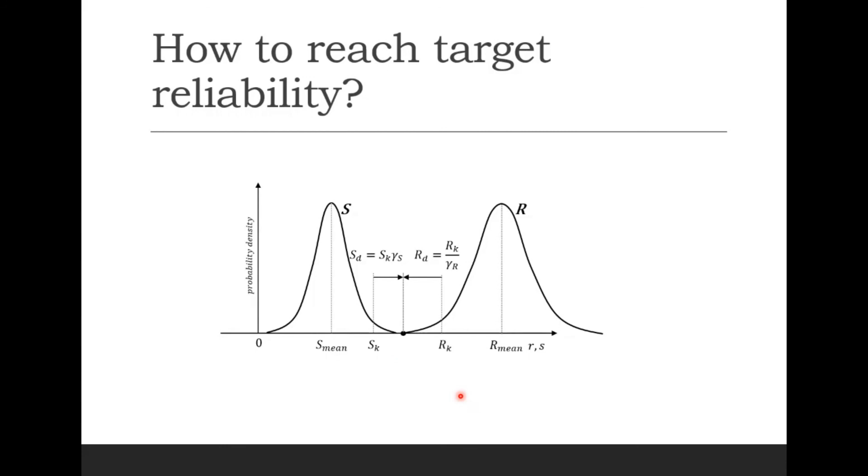And of course we have certain basic distribution characteristics that were developed, for example, that are summarized in the JCSS - certain distribution characteristics, variabilities, coefficients of variability for the different properties or for the different wood products.

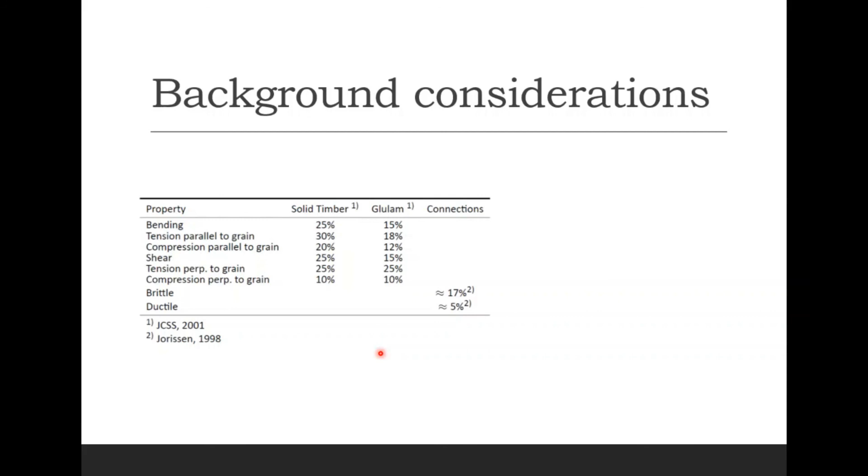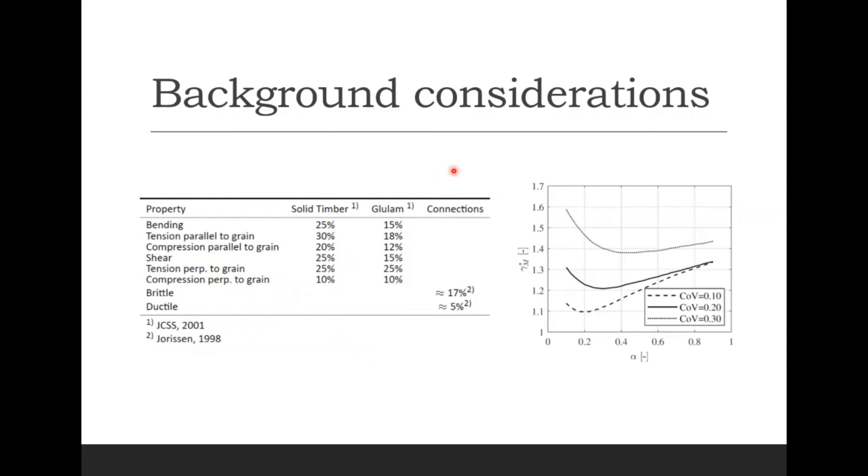But these are quite old assumptions, and it should now be the task to also revise these properties and distribution characteristics, and maybe in a different structure find different characteristics. Depending on the specific distribution type, we might end up with different partial safety factors, and if we can give a better estimation of the distribution characteristics of our material, we can actually adjust our partial factor for existing structures as well.

So here, for example, an example of a large timber structure which was assessed in Switzerland, where you had these large beams. Applying modern conservative design approaches made it very hard, or showed some problems or doubts in the reliability of the structure.

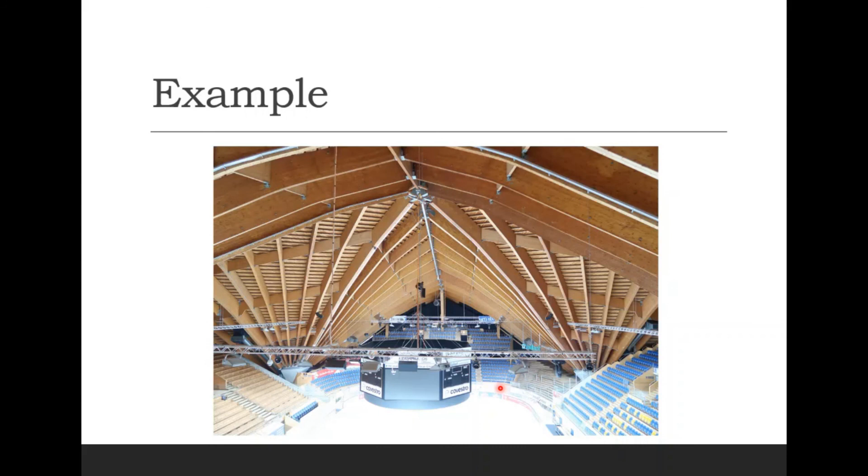But in the end, looking more detailed into the structure, and also considering that this structure was standing already for 40 years, it was possible to make an update of the verifications for this structure.

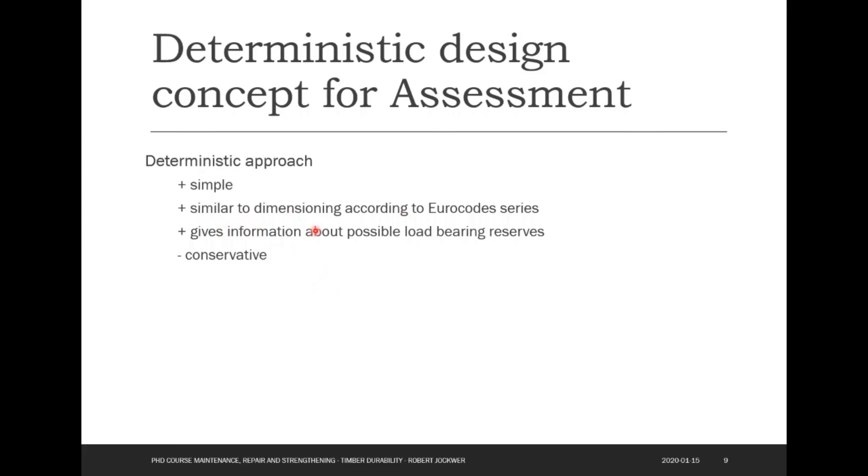If we consider the very simple deterministic approaches when neglecting these distribution characteristics of the properties, it's very simple and we can do a very quick design, but it's also very conservative. Especially for the existing structure, it's more important to make a better differentiation of the different material characteristics of the structure.

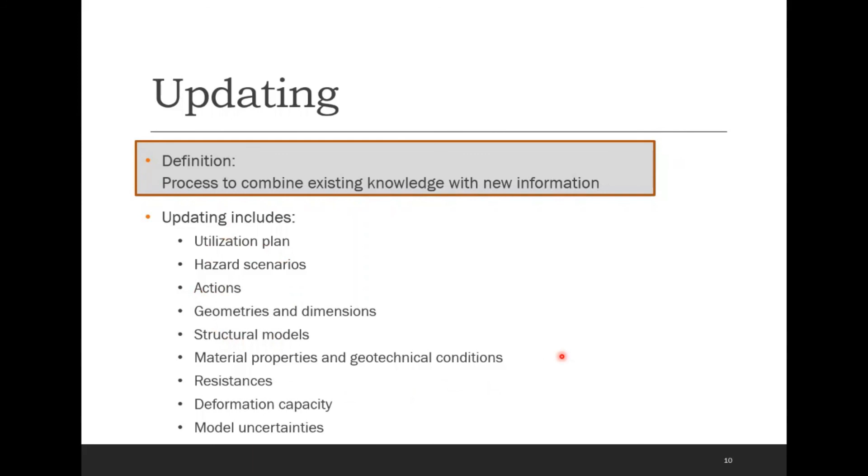And there the updating comes into play, so that we can combine the existing knowledge with the new information. And basically that applies for all parameters in the design of the structure, such as, for example, the geometry.

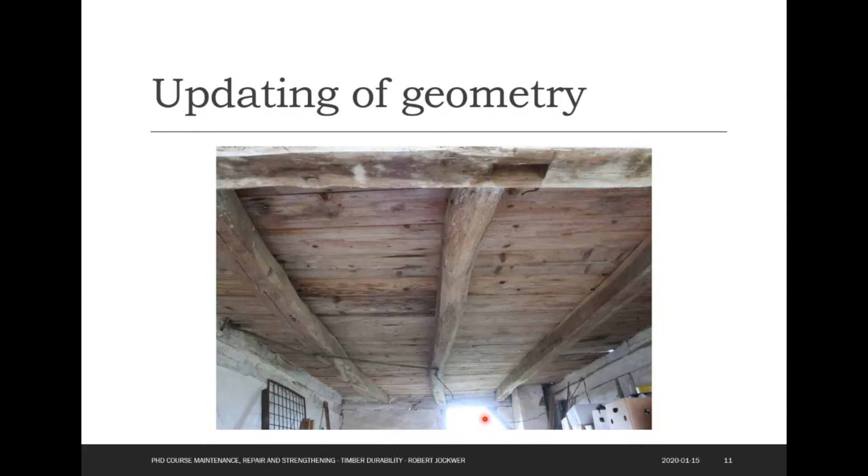Here an example, Mislav might know this, roof beams. Of course, we should consider in the updating of our structure that this maybe beam is not really straight. We might end up with a more complex design compared to a straight beam.

But we can also benefit from the updating when we compare or consider the correlation between material properties. So if we assess, for example, the MOE of a structure, and we find that the MOE is slightly higher than the mean value of the assumed distribution, we can also make an estimation of the distribution function of these updated properties. We might find that we can expect the material properties are actually a bit better compared to our initial estimate.

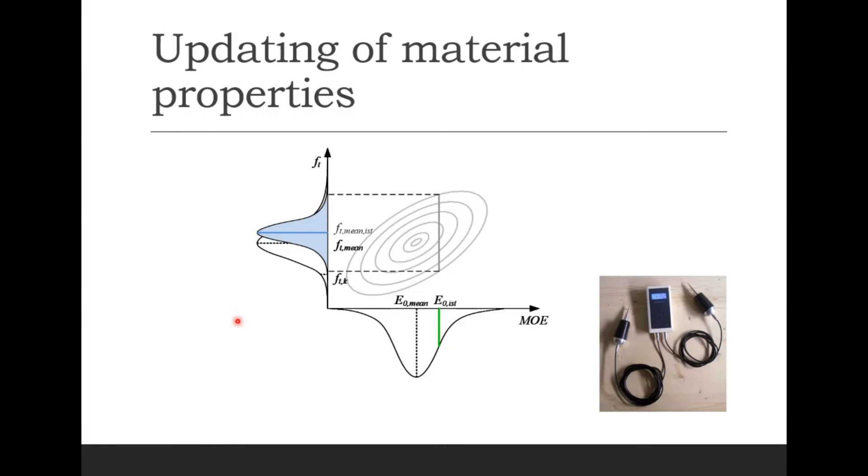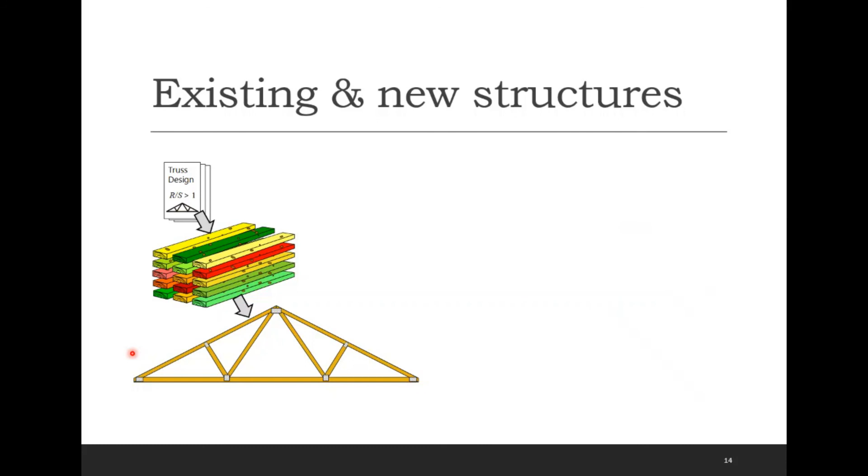That is, of course, then very interesting if we look at the assessment of this truss from the beginning. So depending on where or when we assess the structure, we can make a much better estimation of the actual properties of the members.

And we don't have to work with this bulk, blurry estimation of properties, but we can kind of back-trace the position of the properties of the elements and consider this in our design.

Within the project, I'm currently working on an updating of the material properties and the distribution characteristics of these properties, in order to allow this updating process to consider the distribution characteristics of the properties in a better way.

And I hope that this can be applied for existing structures, but it could also be applied to new structures where we can trace the elements in the structure and do comparative tests to really predict the properties of these trusses in reality, and link it to existing structures where this can be applied.

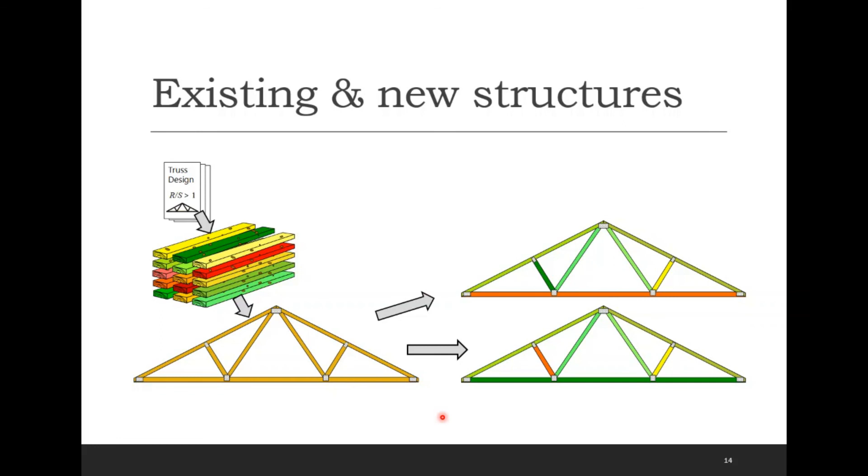Thank you, Robert, very much. It was indeed very interesting, and it's the thing we need in our project. You will be a good team member and teach us how to do all of this reliability stuff. And I hope that from our side we will have enough data for a reliability analysis of timber structures.

I recognized the photo, so thank you for sharing this. And maybe later on we can have a discussion, and for now we can have just a 5-minute break till the next presentation.